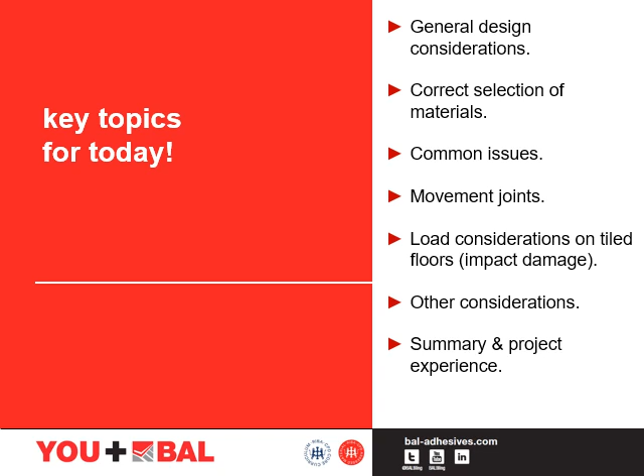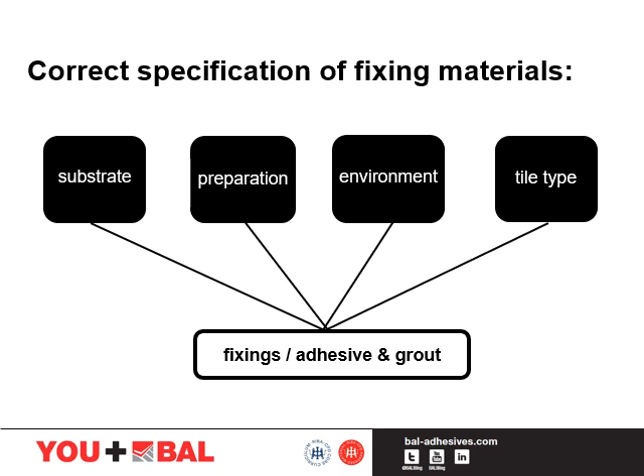Within the CPD today we're going to focus on these topics. We'll look at general design considerations, selection of materials, common issues that we might find within this type of installation, how, why and where to place movement joints, load considerations on tiled floors, look at things like impact damage, other considerations, and then we'll have a quick summary and project experience. In this section of the CPD, we'll be looking at general design considerations. Successfully specifying and installing a tiled wall or floor relies on identifying all of the key elements of the installation. These can include substrate, prep, environment and tile type. We'll discuss each of these in more detail during the next few slides.

Careful consideration should be given to the substrate to which the tiles are to be bonded, together with the nature of any surface preparation required. The base must be suitable for the surface conditions to which it will be exposed. Adequate surface preparation of the substrate is of course important. Now BS 5385 states that local variations in level for a nominally flat floor should be that when checked with a 2 metre straight edge with 3 mm feet at each end, the straight edge should not be obstructed by the tiles and no gap should be greater than 6 mm.

Now, if we're talking about drying times, for example, an anhydrite screed will take longer to dry than the traditional sand cement screed. The anhydrite screed is moisture sensitive and can break down if tiled too early. This is normally caused by excessive moisture being trapped underneath the tiles and then saturating the screed. The surface must also be stable and rigid, and in case of floors, be capable of taking a dead load together with any traffic imposed on it without excessive movement or deflection. The maximum weight limit for tiling to a particular wall background must also be established, allowing 3 to 4 kilos within the maximum weight limit per metre squared for the tile adhesive and grout.

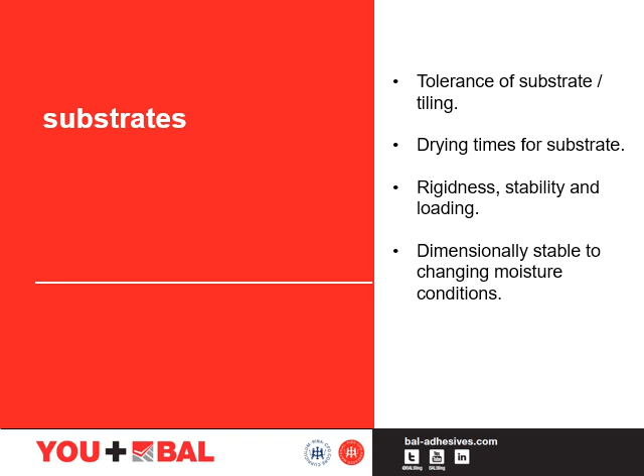Now, dimensionally stable for changing moisture conditions. This is normally based upon sheets and boards. If we take sheets and boards, they must be capable of remaining dimensionally stable whilst in service due to changing moisture conditions. Where appropriate, additional protection must be provided by the application of a suitable waterproofing tanking system. If the substrate to be tiled is not flat and even, any undulations will be reflected in the tile finish. BS 5385-3:2014 recommends a surface regularity of SR1 when fixing tiles using a tile adhesive. No gap underneath a 2 metre straight edge greater than 3 mm when placed anywhere on the floor.

If we talk about tanking, looking at a wet room or a shower, we need to protect the substrate. This is for a number of different things. It can protect the integrity of the building fabric and also protect the room from mould and unwanted smells. Priming. If the surface of the substrate is porous, then this could affect the success of the adhesion of the tiles, so it's always worth priming those substrates. Uncoupling. Now this may be required because of the variation in lateral movement between the tile and the substrates. Check the substrates for the ability to crack.

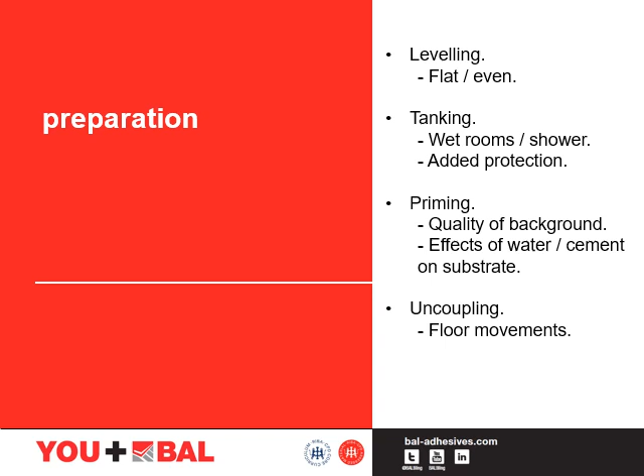So onto the environment. Is it a commercial or an industrial area? What other stresses will the tiles be exposed to? Is it a dry or wet environment? Moisture loading, quantities of water. Are we expecting excessive quantities of water?

Traffic load. What type of static and dynamic loading is expected? Will there be hard rimmed or pneumatic wheel traffic as well as foot traffic? Abrasion resistance. Now what type of damage is the traffic going to cause? Is the floor subject to pressure washing, for example?

Exposure to chemicals. What are the cleaning regime requirements? Is there any chemical usage? Are there any hygiene requirements? Is it a commercial kitchen, for example?

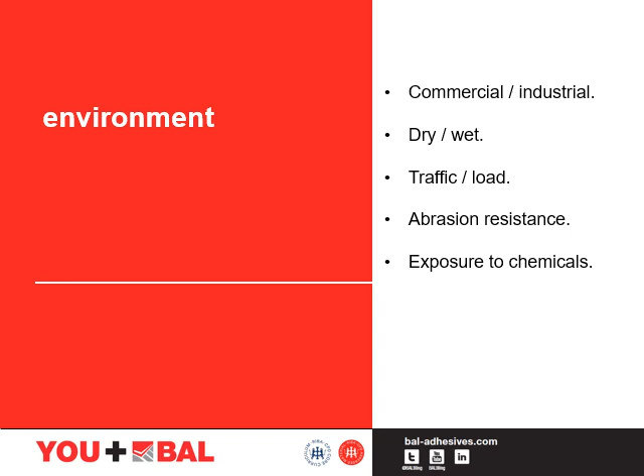There are now thousands of different designs of tiles to choose from. When installing tiles, if they're installed correctly using the right types of materials and specifications, they can be easy to install, hard wearing and durable. We put a 25-year guarantee on all of our specifications, for example.

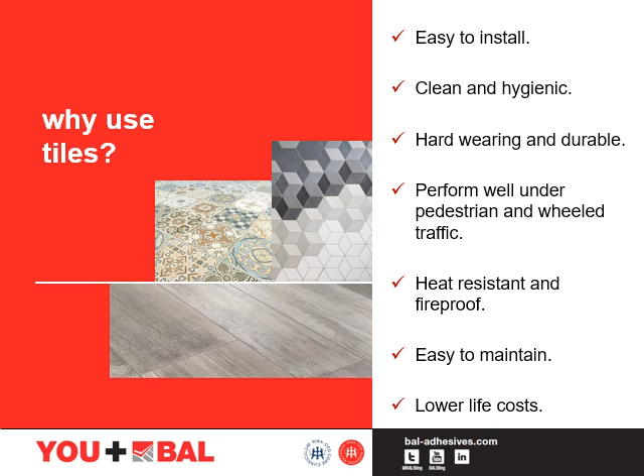This allows us to give you the confidence that if they're installed correctly to the right specification, they will be hard wearing, durable, easy to maintain and have lower life costs than some other finishes. Correct selection of a suitable tile is imperative.

BS EN 14411 is the standard regarding ceramic tiles, their definitions, classifications, characteristics and marking. The ceramic tiles can either have a porous body, which is approximately 10% water absorption, a vitrified body, which is normally 3 to 6% water absorption, or a fully vitrified body such as porcelain. This has a very low porosity, up to 0.5% water absorption. The standard that covers natural stone is BS EN 12057.

BS 5385 Part 4, the Code of Practice for Tiling in Ceramics and Specific Conditions, offers further guidance on the suitability of tiles for floor tiling in specific conditions, i.e. for heavy loads and impacts. For specific conditions where heavy loads are involved, particularly when considering vehicles with hard-rimmed wheels, the strength of the floor will be improved by the use of denser, fully vitrified or porcelain tile types. Further advice should also be sought from a tile manufacturer.

We should also remember that the type of tile and the size of the tile selected will influence the choice of adhesives and grouts. We'll discuss this in further detail in later sections.

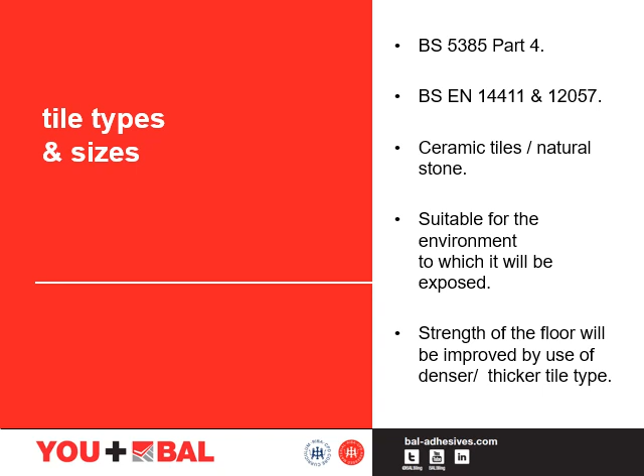The health and safety law requires that floors must not be slippery, so they don't put any person's safety at risk. One method for testing slip resistance of ceramic tiles is a pendulum test to BS 7976. This device uses a swinging arm to simulate the slipping foot, and it can be used wet, dry or with specific contaminants. Research has shown that the pendulum test is a reliable and accurate way of measuring slip resistance both in dry and wet conditions. For this reason, the HSE have adopted this particular test method.

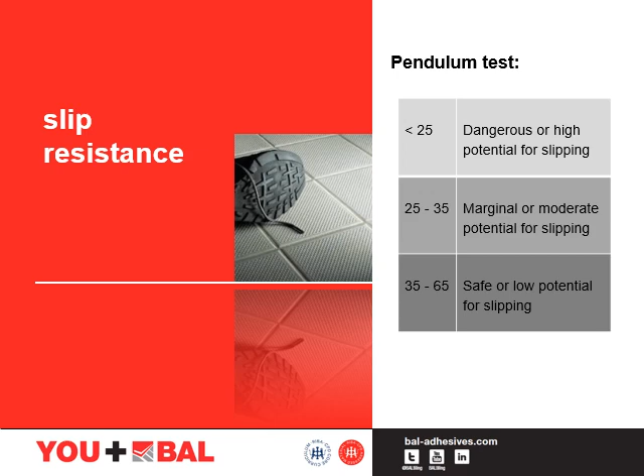In general terms, the slip potential is classed as: below 25 is dangerous or high potential for slipping, 25 to 35 is marginal or moderate potential for slipping, 35 to 65 is safe or low potential for slipping, and 65 plus is extremely low potential for slipping. In reality, no floor surface can be completely slip resistant. If there are any other contaminants present, different levels of roughness will be needed to lower the slip potential.

HSE statistics indicate that one serious slip accident occurs every 3 minutes, most of which occur when the floor surfaces are contaminated. This could be with water or grease, etc. When assessing the potential risks of pedestrians slipping on the floor, it is also important to appreciate the causes and means of preventing floor surface contamination.

A quote from BS 5385-3, Guidance on the Reduction of the Slip Hazard: it is therefore important to ensure that tile floors are adequately cleaned and maintained using a suitable and appropriate cleaning regime. It is advisable to include this in your specification. The quote "ceramic floor tiles are not slippery when clean and dry" holds true.

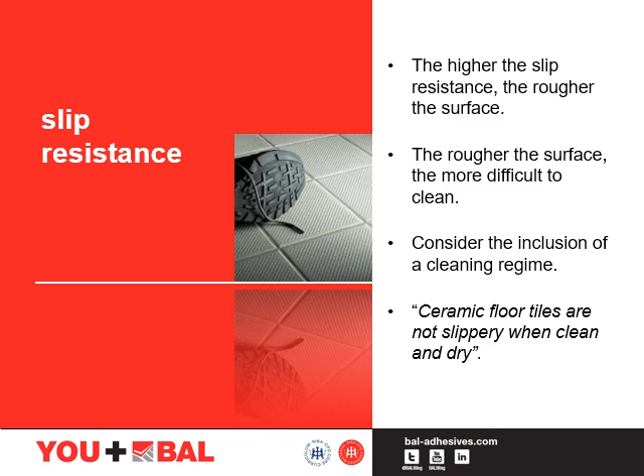There are different types of ramp tests employed in the industry. The DIN, which is a German test, uses oil as lubricant, and the test subject wears boots with heavily profiled rubber soles. The higher the R rating, the greater the slip resistance. R9 is considered the minimum value for use of a tile in a public area.

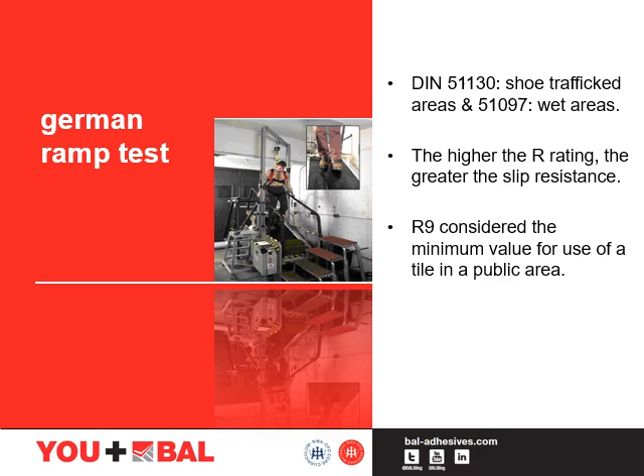The UK HSL has 2 tests, one using plain water as a lubricant and normal type shoes with 4S rubber soles and heels. Test 2 is again using water, but under barefoot conditions. The CEN, which is European standard, uses a barefoot ramp test. However, a wetting agent is put into the water.

This table is a guide to the R ratings as determined by the DIN ramp test and the environment or work areas to which the particular value is recommended. It's also wise to note that as the R rating increases, so does the roughness of the tile.

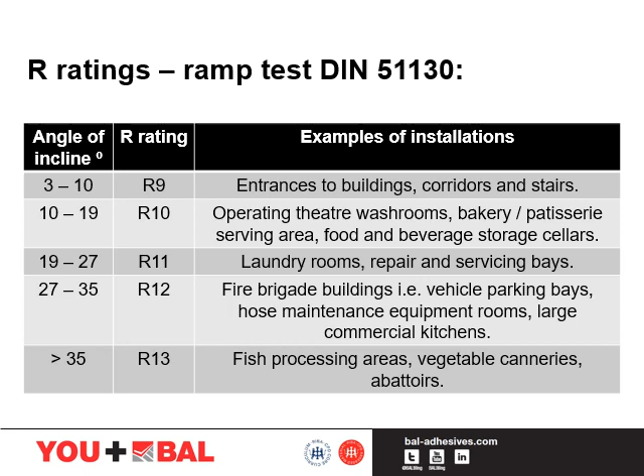First and foremost, safety in use. This should take into account the floor tile slip resistance both in dry and wet conditions, the solidity of the tile finish, i.e. are the tiles fully bedded in the correct tile adhesive. Now, we need to look at the correct cleaning methods. If we specify an incorrect cleaning method, this could hinder the tile slip resistance in the long term.

Movement in the substrate. When we look at the movement in the substrate, we need to make sure we don't have excessive deflection, thermal movement, or drying shrinkage. Also, the correct placement of movement joints could aid with the reduction of cracking in the tile finish.

Environmental factors. As we discussed on previous slides, we are going to have a heavy traffic loading, and what's this going to do to the tiled finish? Also, are we tiling in an area like a workshop where we have the possibility of heavy objects being dropped? This could cause major impact damage.

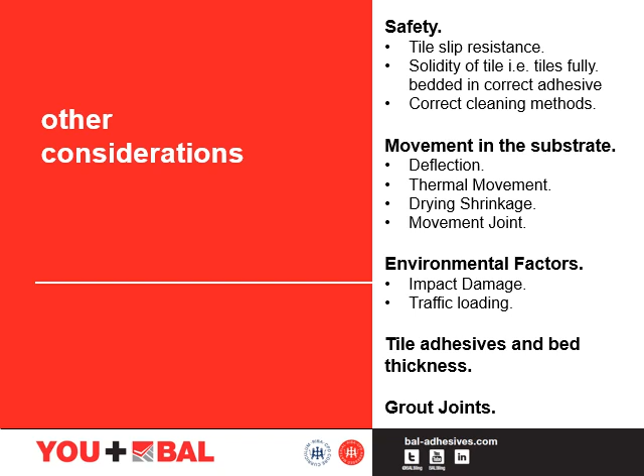We're now going to move on to looking at tile adhesives and grouts. The correct selection of materials. Tile adhesive classification and standards. We have three categories of tile adhesives: cement-based, dispersion and reaction resin. Cement-based normally comes in a bag of powder and is mixed up on site. Dispersion comes in a tub which is water-based and ready mixed, ready for use. A reaction resin is normally a 2 or 3 part product with a resin and a hardener.

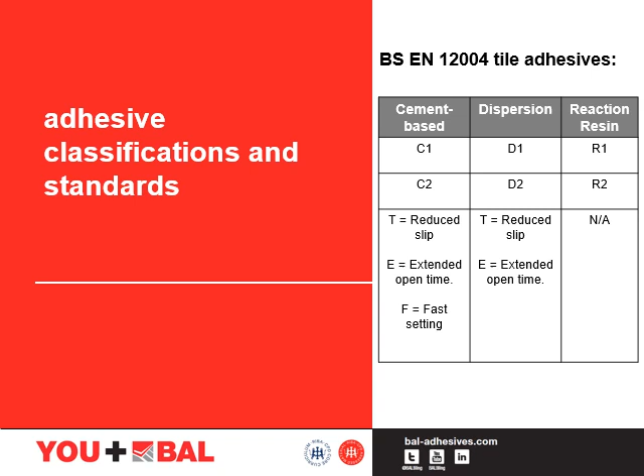Moving on to the classifications, we have 1, which is a normal adhesive, 2, which is an improved adhesive. This meets the requirements for additional characteristics. Then we have a lettered system. So F is a fast setting adhesive, normally cementitious only, and that achieves 0.5 newtons per millimetre squared within 6 hours. T, which is non-slip, that's normally used on walls, and then E, which is an extended open time, which is over 30 minutes. This is for cementitious and dispersion adhesives only.

The first three are not tested for in accordance with the EN 12004 requirements, but are important to the end user and assist in providing an adhesive which is easy to mix and apply with a good working time. It allows for adjustment of pre-bonded tiles within a given time. BS EN 12004-2 has a test to measure for transverse deformation of tile adhesives. This gives us S1, which is deformable, and S2, which is highly deformable.

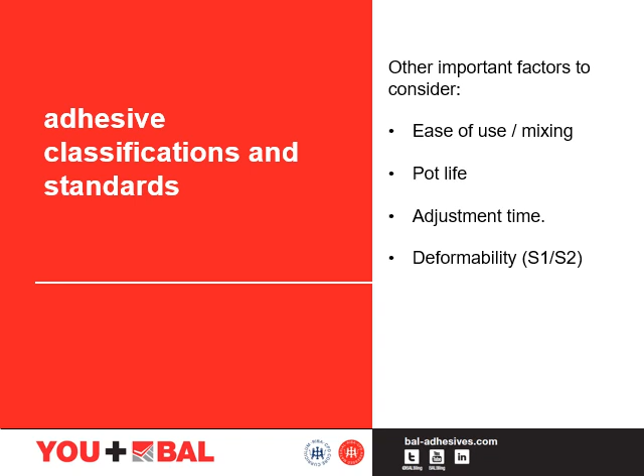Grout classifications and standards. In this section we have cementitious and reaction resin. Cementitious is normally, again, a bag of powder, and reaction resin is normally a 2 or 3 part product which you mix together, which is either a resin, a hardener and a colour, or a resin with a hardener and colour mixed together.

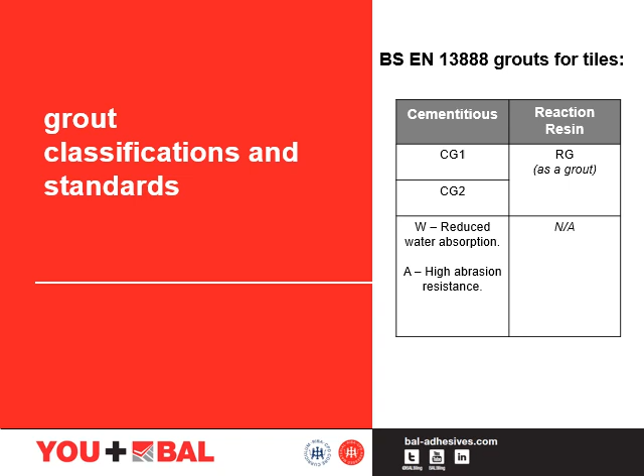The cementitious grout has 2 categories: 1, which is a basic grout, 2, which is an improved or polymer modified grout. The lettering system gives us W on the cementitious side, which is reduced water absorption, and A, which is high abrasion resistance. The main difference between a cementitious grout and a reaction resin grout is that reaction resin grouts are more often waterproof. We will now look at some of the common issues found in this type of installation.

Stresses may arise as a result of substrate movements, such as drying, shrinkage and moisture movements in the background and thermal and moisture changes in the tiling. These stresses, if not properly controlled, can sometimes be sufficient enough to promote the loss of adhesion or bulging and cracking of the tiling. Next, we'll examine the 3 major forms of substrate movement and the examples of failure caused by them.

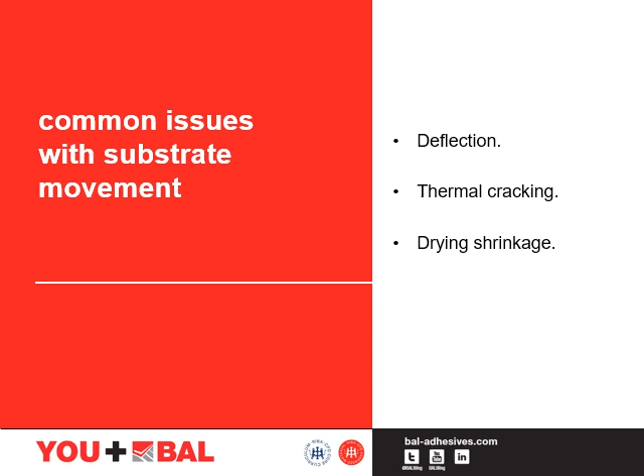A general design requirement for a rigid construction finish, e.g. a tile on its bed, is that the substrate or background and base should be capable of supporting the tiles, bearing in mind the tile types of dynamic or static loads and impacts that the tiled installation may be subjected to. Excessive vertical deflection can cause the grout and more severely the tile to crack. Further guidance on this is found in BS 5385-3 2014.

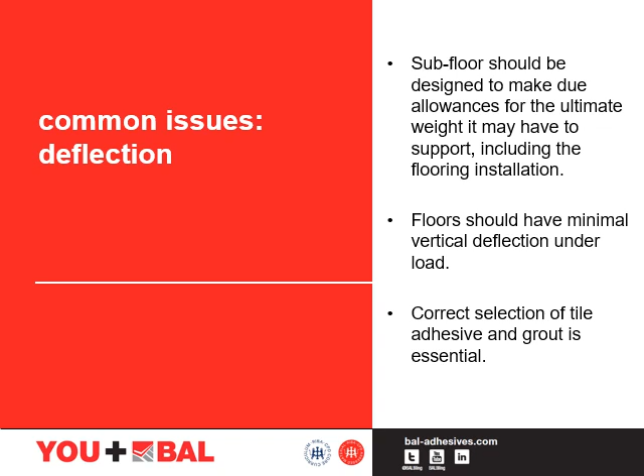When selecting the correct type of adhesive and grout, it is essential that a polymer modified cement-based adhesive is selected conforming with BS EN 12004 and similarly, a polymer-modified cement-based grout should be selected, conforming to BS EN 13888 for a CG2 improved cementitious grout with additional characteristics.

Materials expand and contract when heated and cooled at varying rates. Where elevated temperatures are expected, for example over underfloor heating installations or strong sunlight areas like an atrium or a conservatory, problems can potentially arise. If the amount of potential movement likely to occur between the tile and the substrate is not taken into consideration, this could cause cracking or potential debonding.

Both BS 5385 Parts 3 and 4 provide further detailed advice on aspects of the effects of both high and low temperatures on a tiled installation. The information of the coefficient of thermal expansion for various tiles and substrates can be found in the Tile Association's technical document on tiling to heated floors.

The main consideration to be given to the correct adhesive selection is to ensure that they are capable of withstanding changes due to thermal influences, in particular conduction of heat through the background to the tiled finish and any associated movement due to thermal gradients. A suitable polymer modified cement-based adhesive should be selected, conforming to BS EN 12004, having a minimum C2 classification.

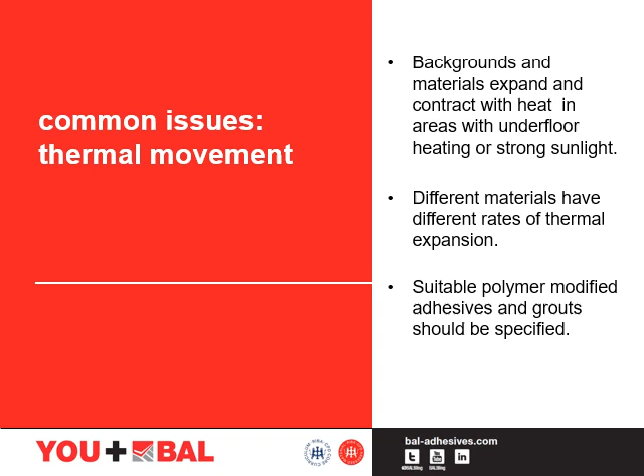Drying shrinkage is the contraction which takes place in concrete and cement-based mortars as the moisture is reduced and they dry out. Compression stress is built up in the tiling layer, resulting in separation between the adhesive and tile, or occasionally between the adhesive and the substrate. Tiles are then forced up from the background or base, causing the tenting and bulging of the tiles to occur.

As a result of this shrinkage, the tiles will no longer be able to fit into the space they once occupied. So, as the concrete or the cement base reduces in size, the tiles cannot do so. They will then tent. There are various factors which can influence the amount of drying shrinkage that is likely to take place, i.e. water to cement ratio, particle size of the aggregate, cement sand mix and proportions, etc.

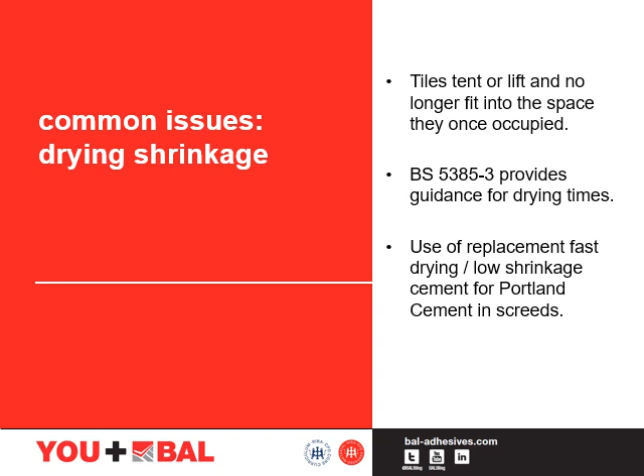The British Standards BS 5385 guidance on drying times is designed to reduce the drying shrinkage and stresses associated with constructional substrates. Replacement of fast-setting or low shrinkage cements for Portland cement in screeds and renders will reduce the drying times from a minimum of 3 and 2 weeks respectively to 24 hours before tiling commences.

Stresses can result from factors such as drying shrinkage, deflection and moisture movements in the base, and also thermal and moisture changes affecting the flooring. These stresses can sometimes cause loss of adhesion and bulging or cracking of the flooring. Movement joints extending through the tiling and its bed should be incorporated into the installation to counteract these stresses. BS 5385-4 2015 highlights the relationship between movement joint types and anticipated traffic loading.

For effective movement joints, we should pay attention to these aspects. Width: it needs to be sufficient to permit the sealant to accommodate the expected degree of movement. Joints should be filled with compressible backup material, then topped up to a final level with sealant. Ideally, the sealant should not bond to this backup material, as this would restrict sealant movement and increase the stress. Sealant should only adhere to the opposing faces of the joint, allowing it to compress and stretch more freely.

Perimeter joints: a minimum 6 mm cross-section filled with a suitable sealant. Now please note that for calcium carbonate based natural stones such as travertine, marble or limestone, we should specify a neutral curing sealant. Intermediate joints for heavily trafficked areas: these joints may need to be filled with suitable proprietary preformed sections incorporating metal or rigid plastic angles, required to protect the tile edges.

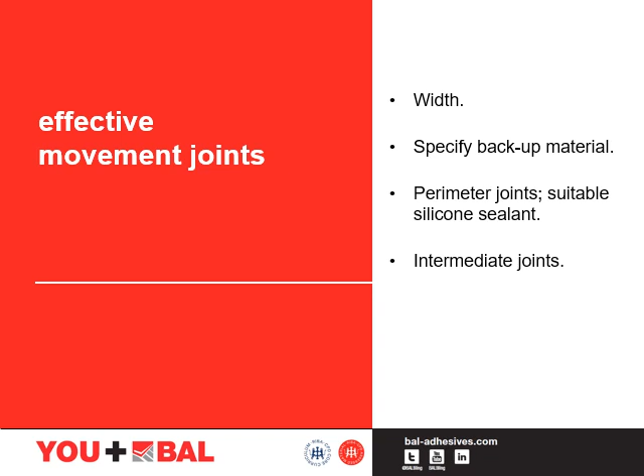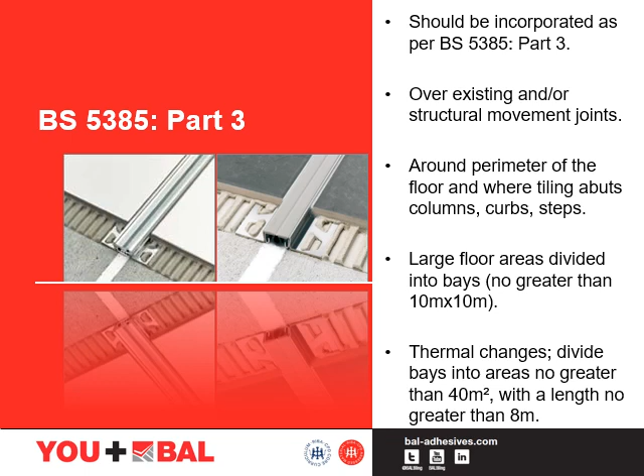Movement joints in the floor tiling should be incorporated as outlined in the British Standard BS 5385 Part 3. Briefly, this document requires that the joints be located over existing or structural movement joints, around the perimeter of the floor, and where tiling abuts columns, curbs, steps or plant fixed to the base. In larger floor areas, the floor should be divided into bays not greater than 10 by 10 metres. For floors subject to significant thermal changes, divide the floor area into bays not greater than 40 square metres with an edge length not greater than 8 metres.

We will now look at impact damage. Impact damage takes the form of a puncture point, usually within individual tiles, from which hairline cracks radiate away. This type of defect is not very frequent and is almost always associated with environments which are under high mechanical stresses. The main causes for this relate primarily to the quality of installation.

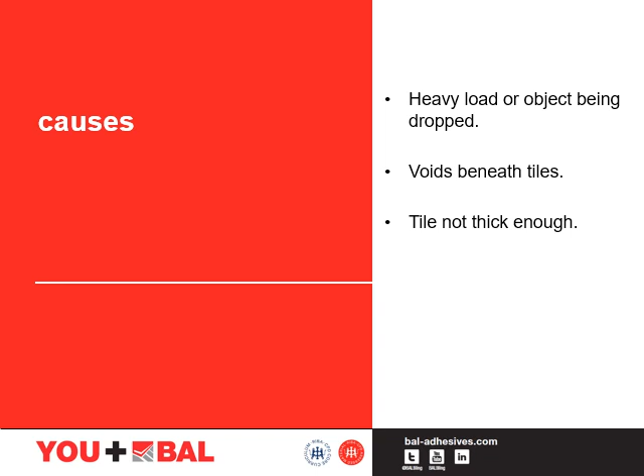If a heavy load or object is dropped onto the tiled floor, a lack of solid support beneath the tiles or air pockets and voids beneath the tiles will help that tile to crack. The tile might not be thick enough to deal with the amount of trafficking imposed upon that floor.

Impact can be defined as the application of a high degree of instantaneous force on a minimal surface and is generally negative for ceramic products. Heavy or pointed objects falling on tiles may damage or shatter the surface depending on the type of object, overall mechanical resistance of the tile, and the adhesive and elastic factors involved in the adhesive or substrate system. The determination of impact resistance is addressed in the European standard through measuring what is known as the restitution coefficient.

The coefficient of restitution can be determined by dropping a 19mm 28 gram steel ball from a height of 1 metre and recording the rebound height of the ball. The table here shows figures for both coefficient of restitution as determined by the dropping ball test and by the use of a Schmidt hammer for comparative purposes.

Here, the types of floor refer to heavy duty, which are factory floors, breweries, supermarkets and bakeries, etc. Medium duty, which is foot traffic, and that includes shopping precincts, office floors, entrance foyers and domestic kitchens. And light duty, which is domestic bathrooms and hallways, etc. When selecting tiles, it should be noted that in general, the greater degree of vitrification, the higher the coefficient of restitution.

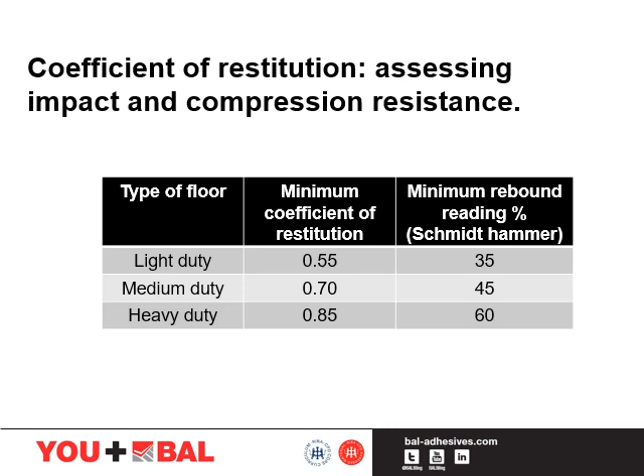To avoid possible impact damage, we recommend these measurements to make sure that the tile floor has adequate impact and compression resistance to the intended service conditions. We need to ensure the floor is level to the British standards recommended tolerance. Solid bed fixing is essential. Ensure no voids beneath the tiles as they become weak spots under load and may trap water, increasing the damage.

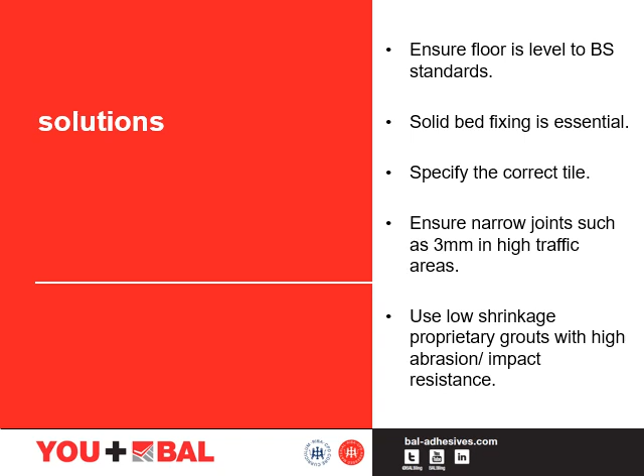Specifying the correct type, size and thickness of tile. The joints between the tiles should be as narrow as possible, i.e. 3 mm in high traffic areas. The use of low shrinkage proprietary grouts and high abrasion impact resistance.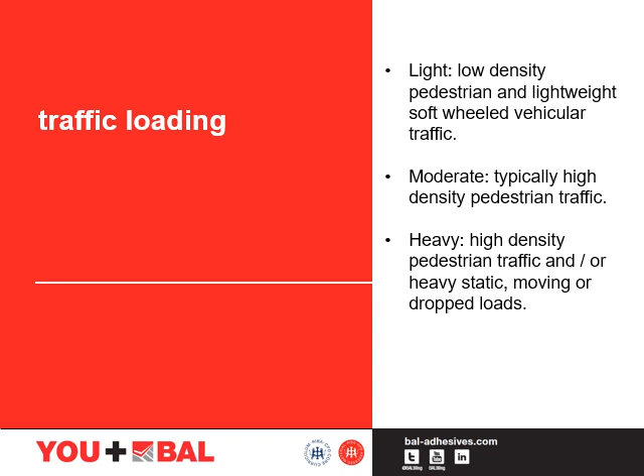We have 3 different classifications of traffic loading. Light loading areas, which include domestic and office locations. Moderate loading areas, which include shopping precincts, entrance foyers and domestic kitchens. And then heavy loading areas, which include supermarkets, engineering premises, for example, garages, heavy vehicles and fire stations, etc. Other considerations.

We need to ensure a good floor preparation, and priming, for example, would increase the bond strength of the tile adhesive. A minimum C2 improved cementitious based tile adhesive should be used. BS 5385-4 advises highly deformable S2 tile adhesives are not suitable for use in heavily trafficked areas.

And where tiles are to be bedded on a cement sand screed, the screed should be suitable for the anticipated load and be tested for soundness in accordance with BS 8204-1. In the area in which the screed is tested, 90% of all indentations should be category A, which is a maximum depth of 3 mm.

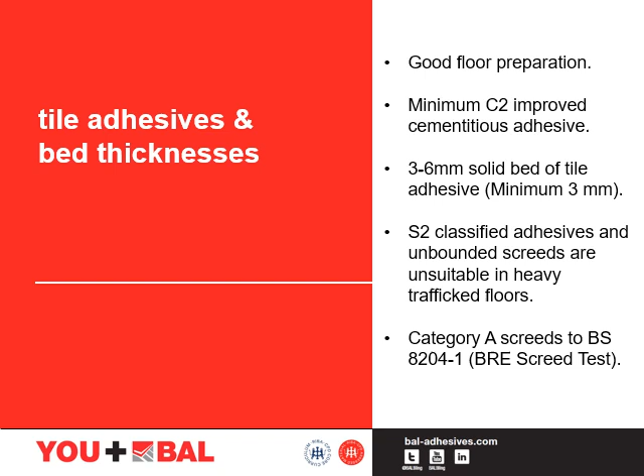The maximum joint width should not exceed 10 mm, and proprietary grouts specially formulated with enhanced resistance to impact and abrasion and low shrinkage should also be used. Typically CG2A or CG2WA grouts should be used. Where the tile finish is likely to be exposed to abrasive cleaners and requires additional chemical resistance, i.e. garage floors or commercial kitchens, for example, a reaction resin grout or epoxy grout should be used.

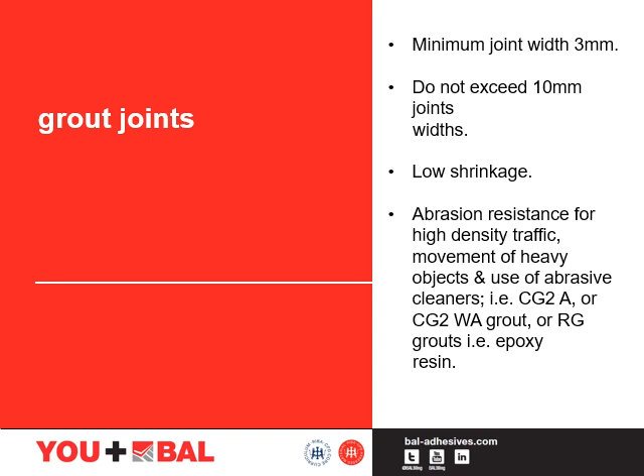Now we'd like to talk you through a couple of our most recent heavy duty projects. When flooding hit Lowestoft, one of its first victims was the major car and motorcycle showroom of Lings Honda. The premises disappeared under 3 feet of water and Lings had to scrap more than 150 vehicles. Once the flood waters subsided, it became clear that some parts of the premises themselves would need extensive work. When it came to retiling, returning the Lings flagship to its former glory was not a quick fix.

Having to wait for dry conditions was only the first hurdle. Then, the site had to be made ready for tiling. By the middle of February, a team of fixers was on site and working, but it was not just a case of replacing tiles. Support technicians were closely involved, helping to minimise the potential impact of any further natural disasters. The team prepared the floors for tiling and then used solutions to stop damage from the lateral movement in the substrate, and also provide a reduced material consumption, to ensure a long-term solution that could provide excellent value.

London Southend Airport was extended, which included the development of a new departure lounge. More than 5,500 metres of porcelain floor tiles were laid. Floor tiles were laid onto power-floated concrete finish, a hard-wearing substrate often specified for high traffic areas. Due to the substrate and the heavy traffic use, consideration was needed to ensure that the surface was primed, and flexible, highly polymer-modified adhesives were used in conjunction with flexible, highly abrasion-resistant grouts. For installation speed, flexible, ready-mixed solutions could be used on the 300 square metres of white gloss tiles used on the walls of the toilet facilities.

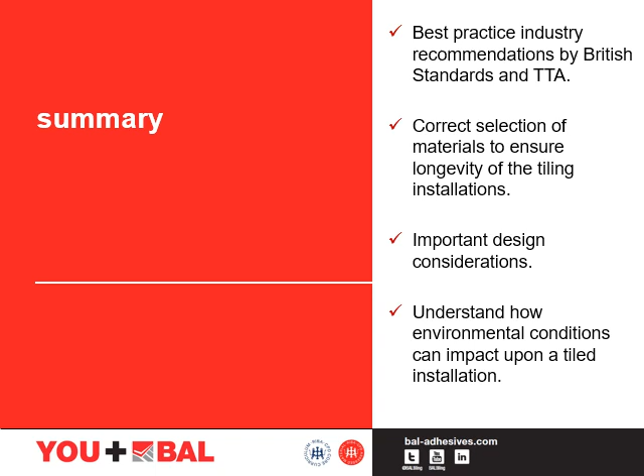To recap, we've covered the best practice industry recommendations by the British Standards and the TTA, the correct selection of materials to ensure longevity of tiling installations, important design considerations, and then understanding how environmental conditions can impact on a tiled installation.